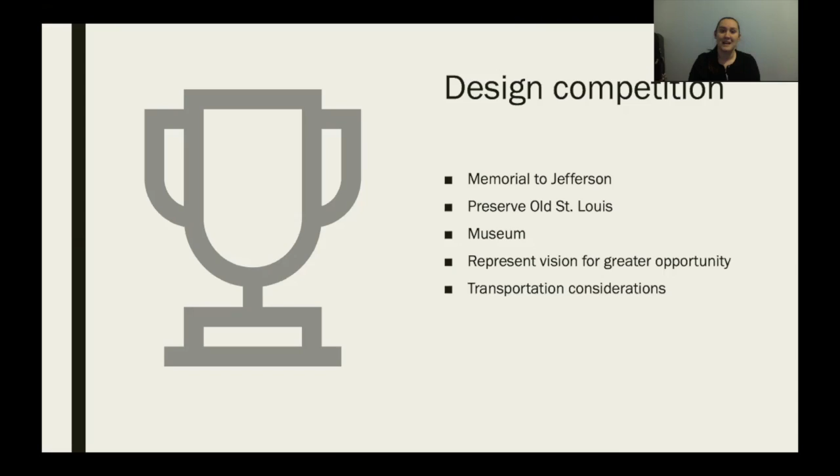In 1947, the architect Eero Saarinen was the winner of the competition. He had a team of a landscape architect, a sculptor, and a painter. With his team, they were able to come up with a design that was kind of modeled after the catenary curve. And Eero actually won this competition over his father, who had also entered and was an architect as well.

So the equation of this curve is given by the equation on the slides. And the curve is one that would be created by a chain hanging freely between two supported points. Now this would be in the case of an ideal curve. The equation would change based on the weight distribution along the chain. So this one is given specifically by one that would have a uniform weight across.

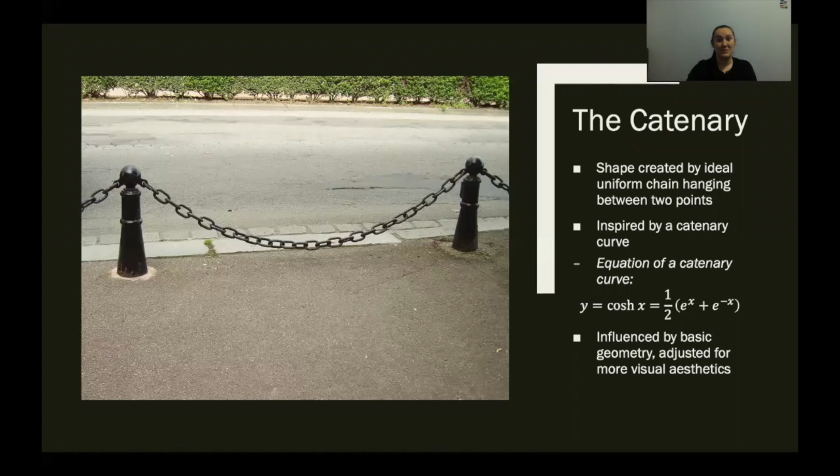The architect was often inspired by just basic geometric shapes and then would make adjustments as he went based on what he found more visually appealing. So this was the case for the arch that he designed. As you can see, the equations here are a lot more complicated than the original catenary curve equation.

He originally designed it with a 20 to 21 aspect ratio, with the base width from the outside edges of each of the legs being 630 feet, and a height of 590 originally. However, by the time construction actually came about, he had readjusted the design to be 630 feet high as well, making it a 1-to-1 ratio.

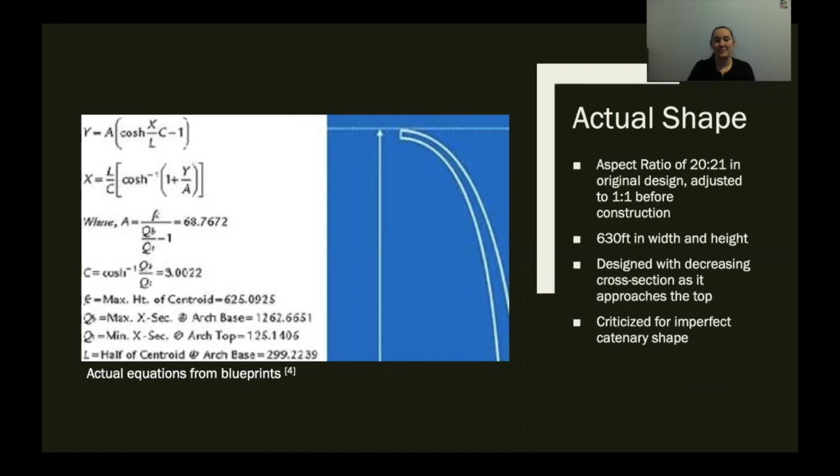The legs were designed with an equilateral triangular shape and were decreasing in cross-section as it approached the top. And this was to create less of a load in the center of that arch. And he was often criticized for creating this imperfect catenary shape because they called it impure math, and basically said it didn't do justice to basic math.

As all architects should, Saarinen consulted structural engineer Fred Severud to make sure that his design was actually feasible. So the arch was designed from stainless steel legs shaped in equilateral triangles. The ones closest to the base were 54 feet in length, and the ones closest to the top of the arch were 17 feet in length. These equilateral triangles were then stacked and welded together both on the inside and outside.

The steel was used in kind of a double-walled fashion, with the spacing at the bottom being about 3 feet and closer to the top about 7 inches. And the spacing was then filled with reinforced concrete. The reinforcement used was pre-stressed bars. Close to the top, where they couldn't have the wall spacing, they used steel stiffeners for reinforcement. And then the exterior was covered with stainless steel and the interior was covered with carbon steel.

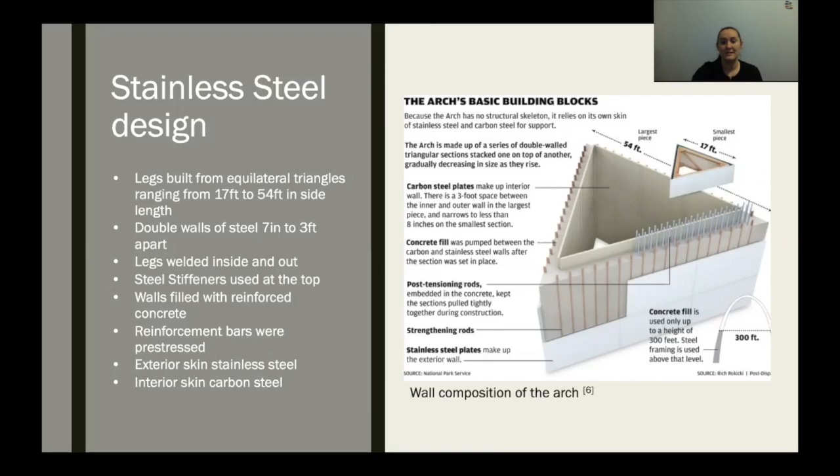And this image physically breaks down all of the different components that built up those legs. At the time, there wasn't any formal structural design manual or guide for welds, but there was specified on the blueprints type 304 austenitic steel, which is preferred for its weldability. And it was ordered to an ASTM A167, which actually is no longer in production today. The chart shown here on the slides is what the specifications would be today.

The arch was finished in construction in 1965. The design guide didn't become available until 1968, and the arch actually paved the way for some of the standards that were created for stainless steel structures specifically.

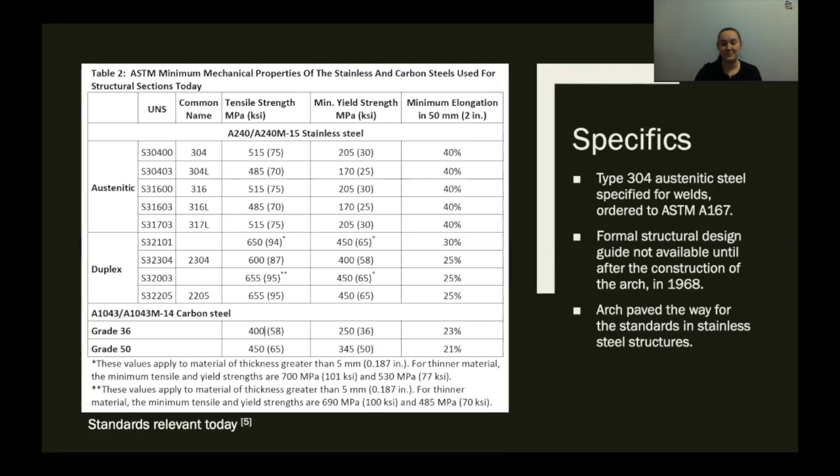Some extra considerations. Because this monument does actually carry people inside, people can ride a tram to the top, it had to be subjected to serviceability standards and safety regulations for having people inside. It has trams that carry the people up to the observation deck, going up both sides of the legs. And it's also equipped with emergency stairs and elevators in each leg.

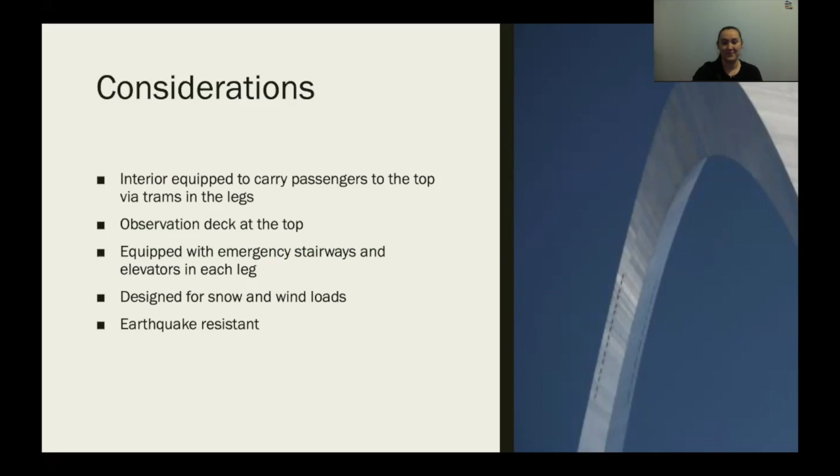And it does snow in St. Louis, so it had to be designed for snow loads and wind loads. It can resist up to 150 miles per hour winds. It's also earthquake resistant with a sway allowance of 18 inches, which while it's unrealistic for it to actually reach 18 inches, it does have the capability to sway that much. And the skin made out of stainless steel was selected specifically because stainless steel has a higher resistance to corrosion.

As far as construction goes, as I mentioned earlier, the design was approved in 1947, but the construction didn't actually start until 1959. This was partially due to some issues with the land and permits because there was historical value to some of the surrounding areas. The foundation was completed in 1961 and then full construction began in 1963.

There were some delays due to civil rights protests. As I mentioned, this was a big project for job opportunities, and there were a lot of protests regarding racial discrimination when it came to these jobs, as well as to subcontracting. Construction was complete in 1965, and then it was open to the public, but it became fully open to tourists and visitors in 1967. And the memorial aspect of it was finalized in 1976.

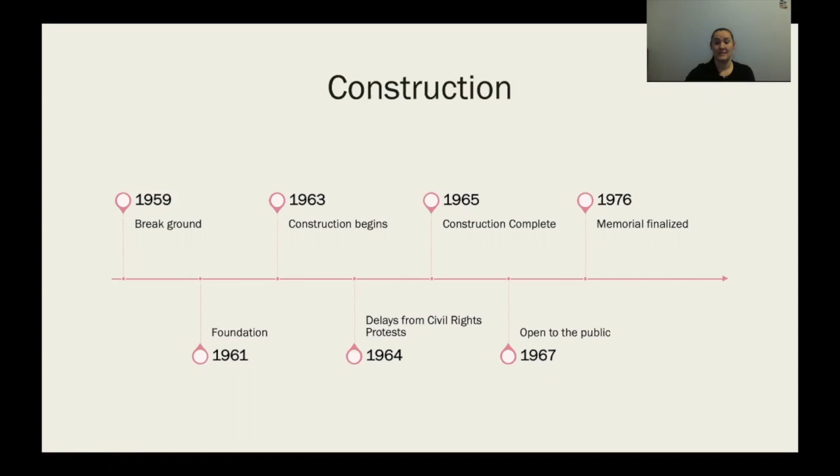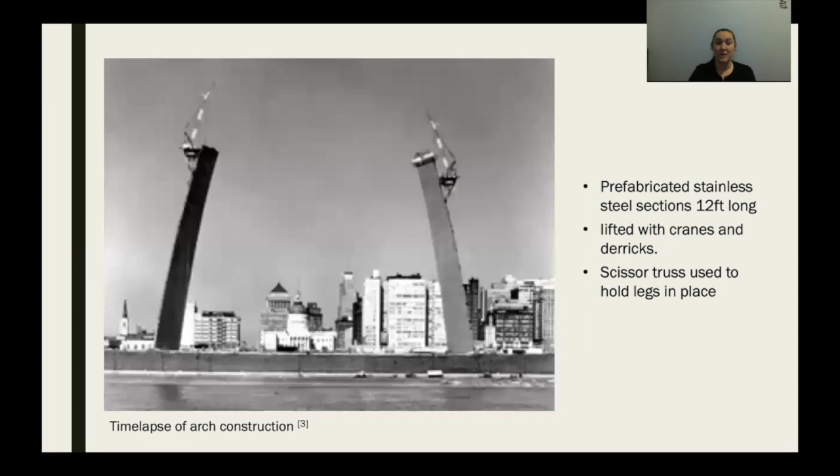So here's a time lapse of the arch being constructed. Basically they used a process of prefabricated stainless steel sections that were 12 feet long, consisting of the equilateral triangles that were welded together, as well as the reinforced concrete. They combined these sections and lifted them up with cranes and derricks. And as you can see, toward the completion of the top of the arch, they used a scissor truss to hold the legs in place as they allowed the top of the arch to connect.

As you can see, it's quite a remarkable building. It has paved the way in using stainless steel in a structural sense. And even in the symbolic way, it holds a lot of meaning to the city of St. Louis. It wasn't on the map, or it was a dying economy, and it helped to reboost it. It brings thousands of visitors every year, and it's quite the tourist attraction.

It also attracts skydivers and people seeking thrills, even though they're not allowed and generally need specific permission. For example, air shows always need to get specific permission from the government, and are often denied, to be able to fly through the arch. Anyone that's skydiving has to get permission to go through the arch. But there have been several people charged who have broken the law and done it. So it's quite the attraction, both historically and just for visual appeal.